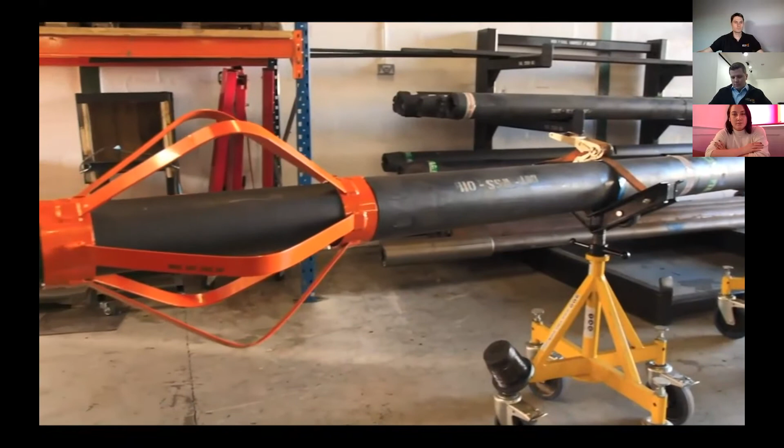DeltaTek is a well construction specialist supplying novel technology solutions to the drilling industry. Low risk, high value technology. That, in a nutshell, is what DeltaTek provide, and has done so with proven rig time savings to enable lower cost of drilling operations. That's lower financial cost, lower risk cost, and importantly, lower carbon cost.

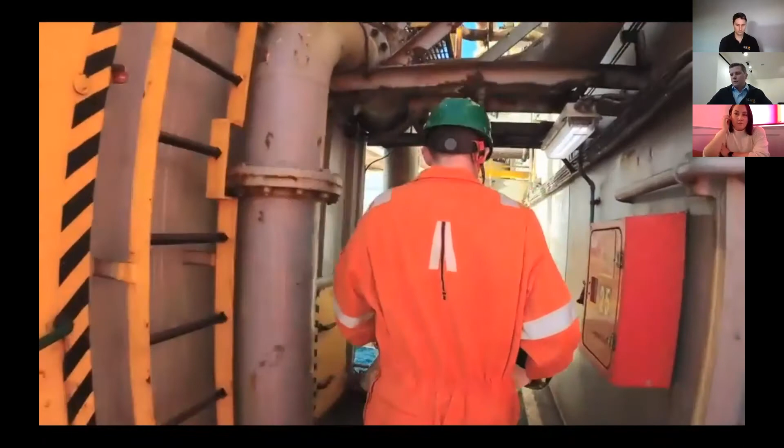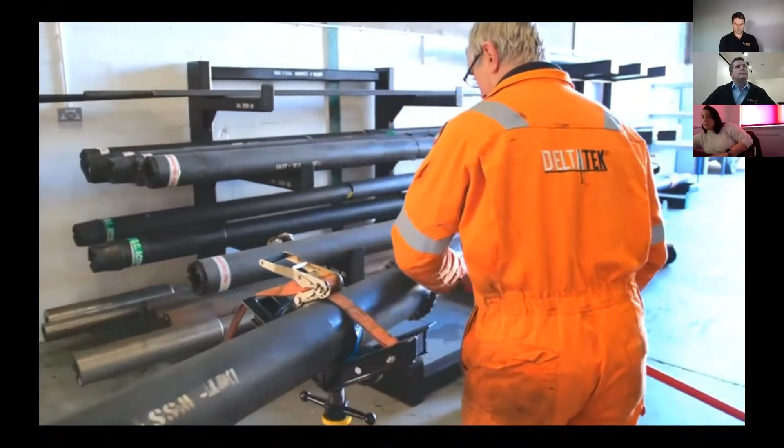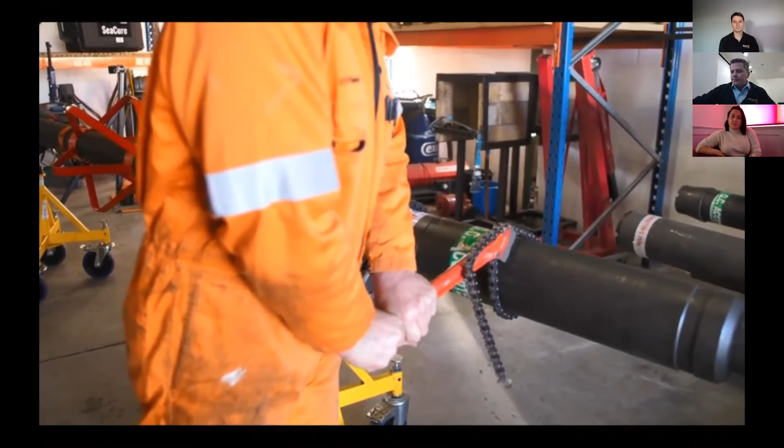DeltaTek has become a well-recognized name in the oil and gas industry, probably best known for its SeaCure technology, which has been rapidly adopted across the North Sea since its initial deployment by Chevron and Siccar Point Energy in 2018. Since these early days, DeltaTek have developed multiple low-risk technologies to further reduce its customer well construction risks, saving rig time and adding value in the process. DeltaTek now deploys its SeaCure and Articulock technologies across the globe, from the depths of the Southern Oceans all the way to the Arctic Circle.

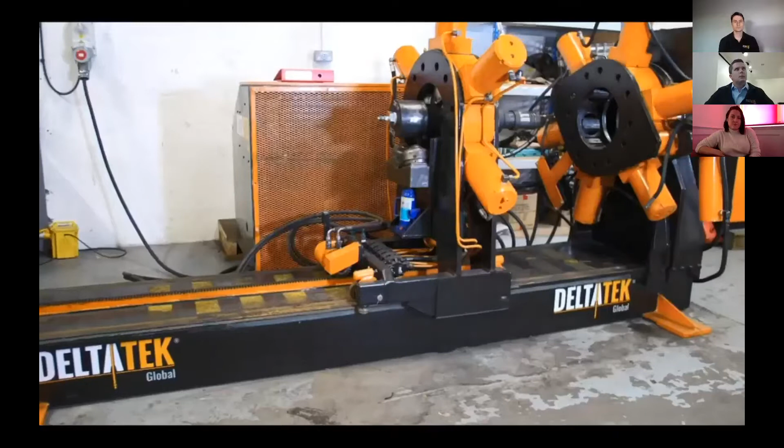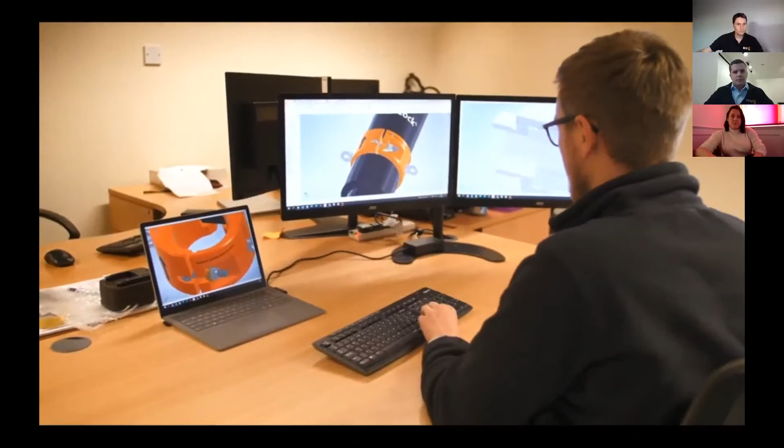Since our first deployment back in 2018, I'm happy to say we've come a long way and are about to do our 20th deployment. Our customers have shown great acceptance of our technology, mainly due to its simplicity and the value it brings. I'm also happy to say that since our first deployment, we've maintained a zero NPT. Our customers have been very engaged and really helped us develop from our first technology into what we have today. And I'm happy to say they also come back for the second and third operations, which is a testament to the simplicity of our technology.

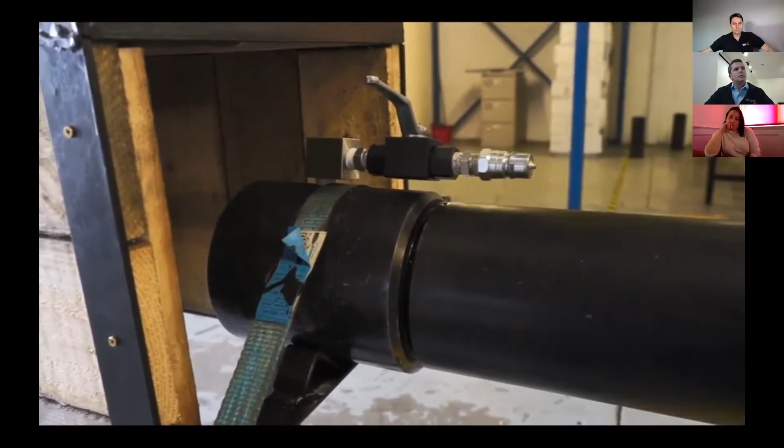We have gone from humble beginnings here in the North Sea to having deployments in the southern tip of Africa, the eastern Mediterranean, and now most recently up in the Arctic Circle. And very soon we're about to go west. DeltaTek offers a step change in well construction efficiency and has developed solutions that reduce carbon costs. That means that our customers benefit from supporting net zero targets without being penalized on a cost or efficiency basis.

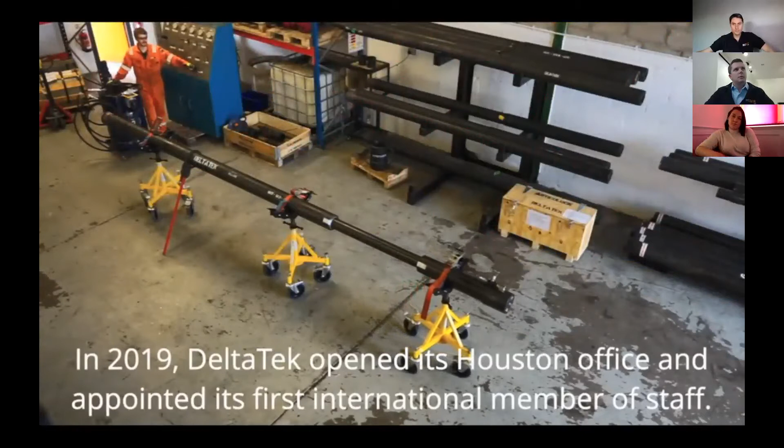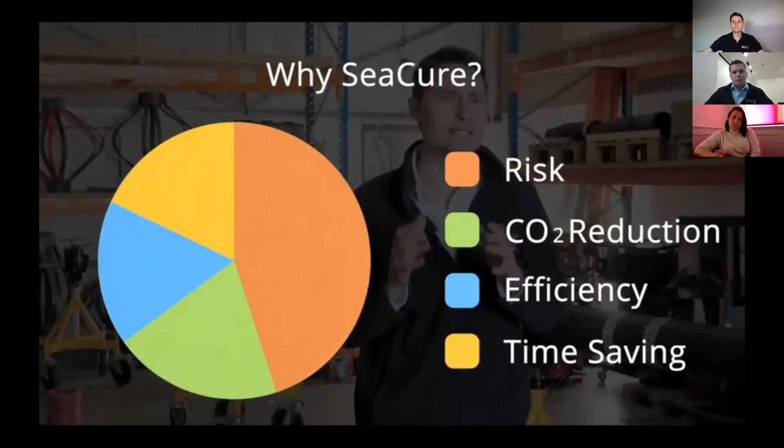We've gotten verbal confirmation from the client, working towards a 2-year contract and working out some of the technical details with their wellhead running tool provider this afternoon. DeltaTek does exactly that, supplying intelligent, time-saving, cost-lowering, risk-mitigating technologies that concurrently reduce our customers' impact on the environment from the earliest stages of the well's life cycle.

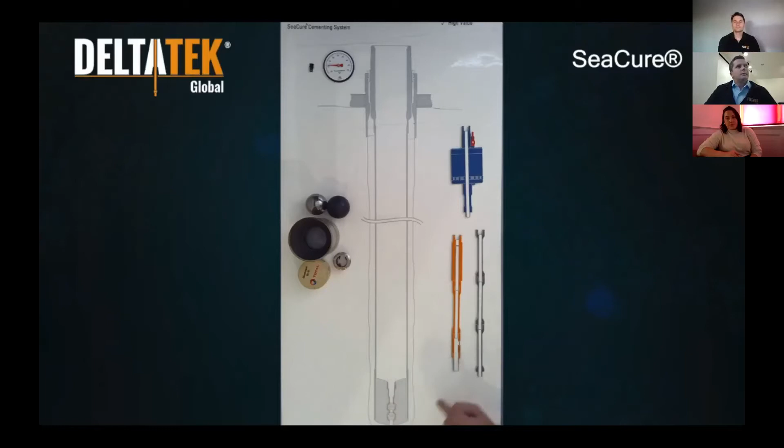For this demonstration of the SeaCure cementing system, we're looking at a riserless section, such as a cemented conductor or surface casing, for which a SeaCure compatible float shoe will have been pre-ordered with requisite latch and adapter and potentially lockdown wiper plug receptacles. Once the casing's been run and hung off at the rotary table, we're ready to run inner string.

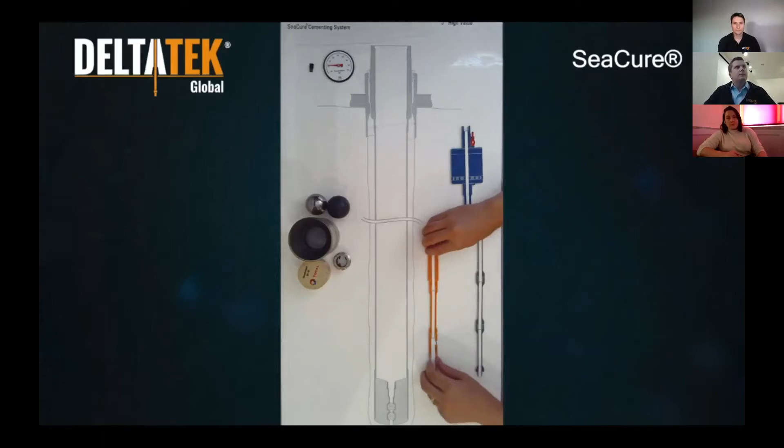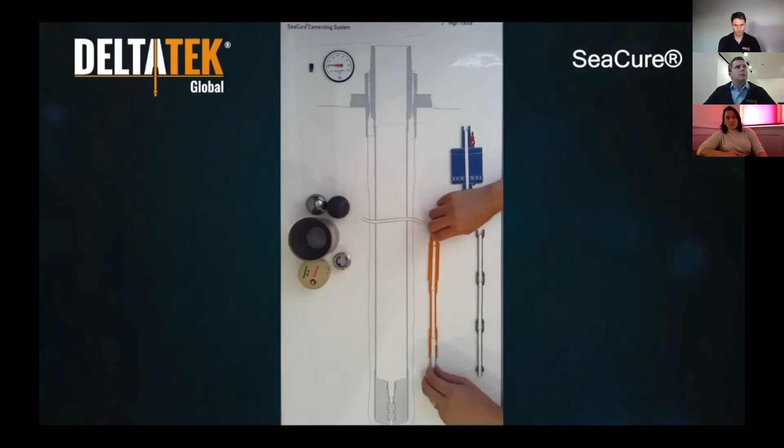The first thing that's picked up is a SeaCure BHA, comprised of our latch and adapter, weight set sub, and SeaCure slip joint tools. This BHA is 30 feet long in its closed position. Once it's picked up, the SeaCure tool strokes open under its own weight to lengthen the assembly to 40 feet. This 10-foot of stroking distance is what allows you to approximately space out your inner string within the casing bore.

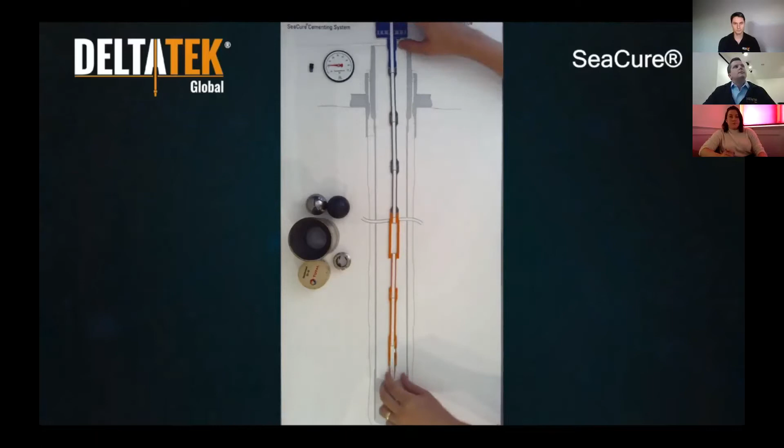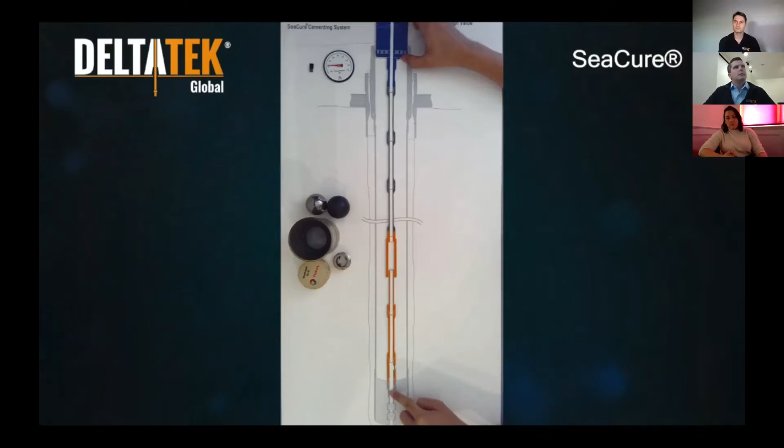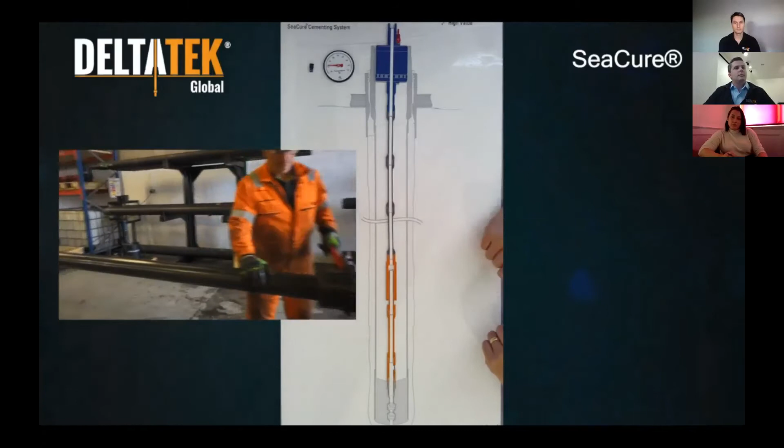The SeaCure BHA is run into the casing on drill pipe until made up to the cam actuated running tool. Inner string is then lowered until the latch and adapter engages, which is confirmed with an overpull. As the running tool is established, the SeaCure tool strokes partially closed. Upon closing just 4 inches, the SeaCure tool's internal clutch mechanism disengages to allow free rotation of the inner string along with safe makeup of the cam actuated running tool.

It's important to note that the running tool's ball valve is left open for the duration of the SeaCure cement job due to the hydraulic seals effected within the float shoe at the latch and adapter. At this point, the casing can be run to cementing depth and primary cement job pumped. At the end of the cement job, a lockdown wiper plug can be launched into the string and chased with slurry to guarantee good quality cement around the shoe.

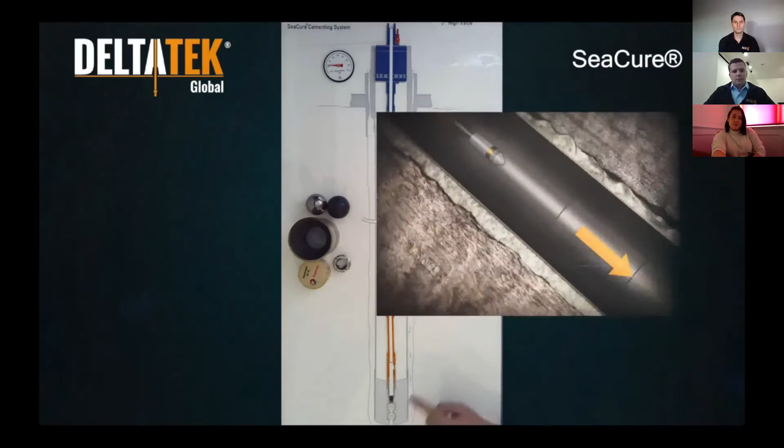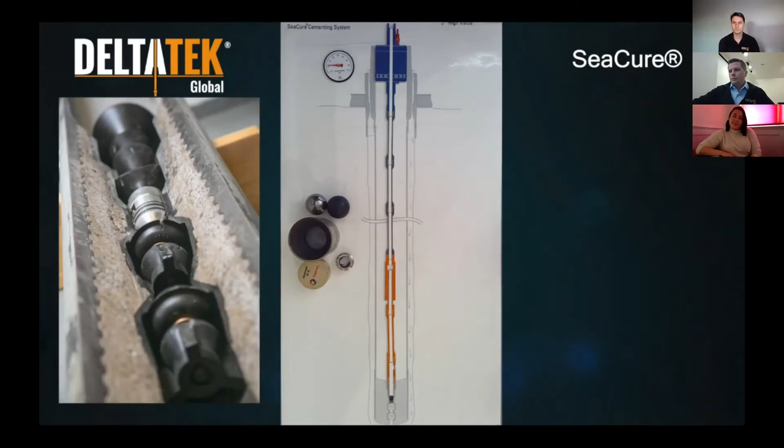It's important to note that the lockdown wiper plug effects a bidirectional seal after it bumps because of a ratchet mechanism built into the nose on the plug and corresponding receptacle in the shoe. Subsequently, pressure is applied to the inner string to actuate a burst disc that's been pre-installed within the latch-in adapter here. Once this burst disc ruptures, the remainder of the inner string contents can be circulated out via the inner annulus and vented to seabed.

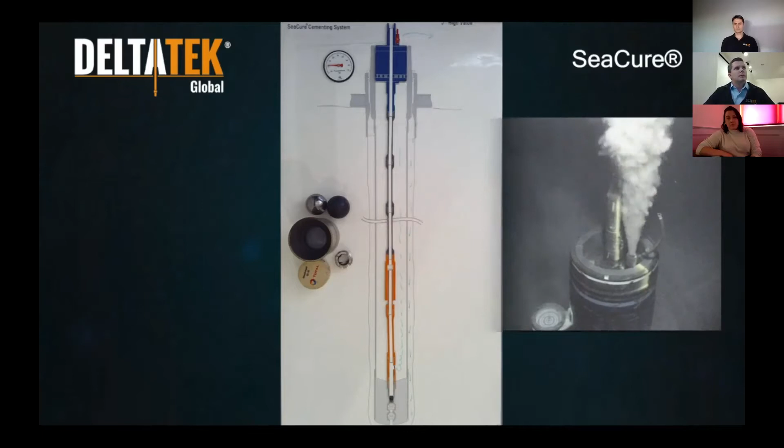The running tool's ball valve can then be closed by ROV to enable a life of well integrity casing pressure test immediately after pumping the cement job. Importantly, this test can be completed against green slurry in the borehole annulus, mitigating the risks of weakening the cement bond and creating a microannulus due to the radial expansion of the casing under pressure.

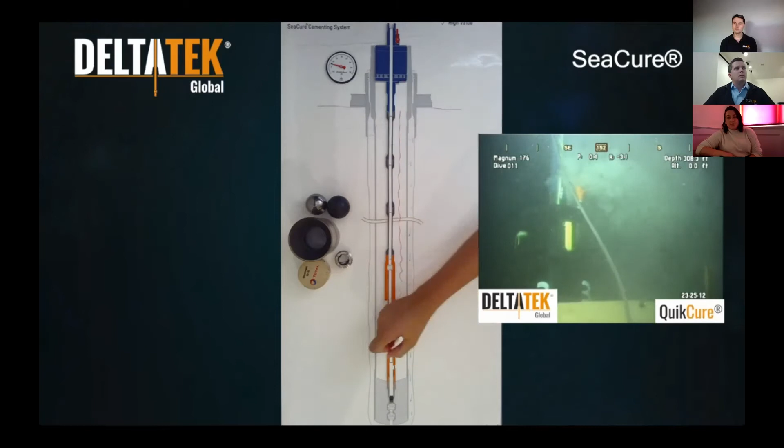It's also possible at this point in the job to introduce our patented QuikCure process. The QuikCure process utilizes a pit of seawater that's been preheated on the rig to approximately 65 degrees Celsius or 150 Fahrenheit. This heat sweep is then rapidly circulated into the inner annulus. After the casing bore has been filled with the heat sweep, a maximal exit temperature is observed on an analog temperature gauge that's been pre-installed on the running tool's ball valve.

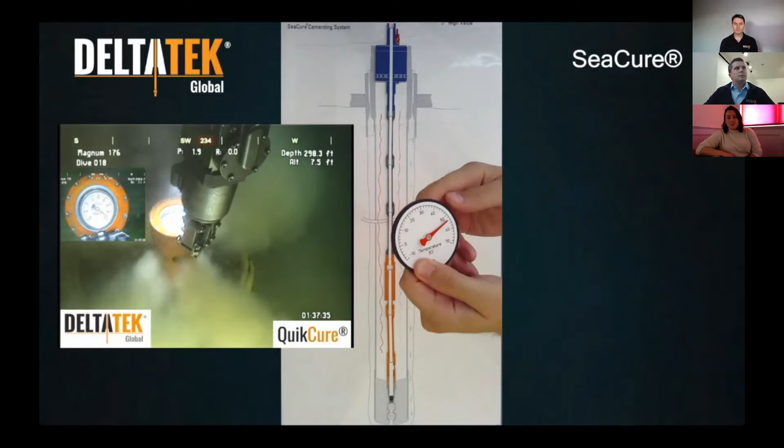At this point, the ball valve can be closed to allow the additional heat to soak through the casing wall and into the slurry. The additional heat causes a rapid build in compressive strength while reducing wait on cement time by up to 70% and improving transition time up to 50%.

As an option for most SeaCure jobs, a ball drop activation mechanism can be utilized in lieu of the lockdown wiper plug. There are a few key procedural differences for the ball drop version of SeaCure. Once the primary cement job has been pumped, instead of launching a wiper plug, the SeaCure ball is dropped into the inner string after displacing the cement job within a few barrels of the shoe.

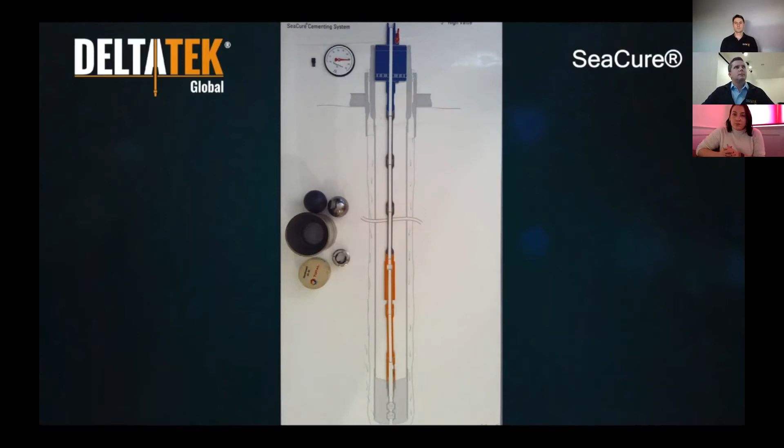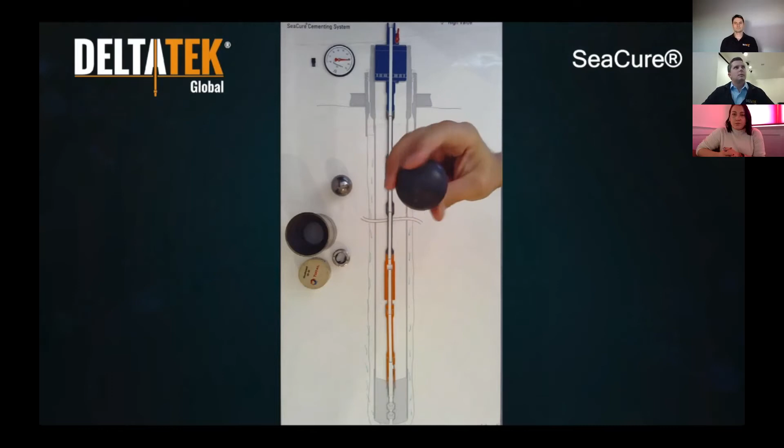The SeaCure ball starts its life as a 1.75-inch tungsten core. It's built up to 1.9 with an NBR coating, seating within a 1.88 counterbore in the ball seat that's been pre-installed in the latch-in adapter, roughly 14 inches off the nose. The ball gravitates down and lands within its seat. After pressure is applied, a half-inch packer-style seal is effected in the NBR coating. It's important to note that a no-go shoulder has been designed within the ball seat to ensure the ball can be retained.

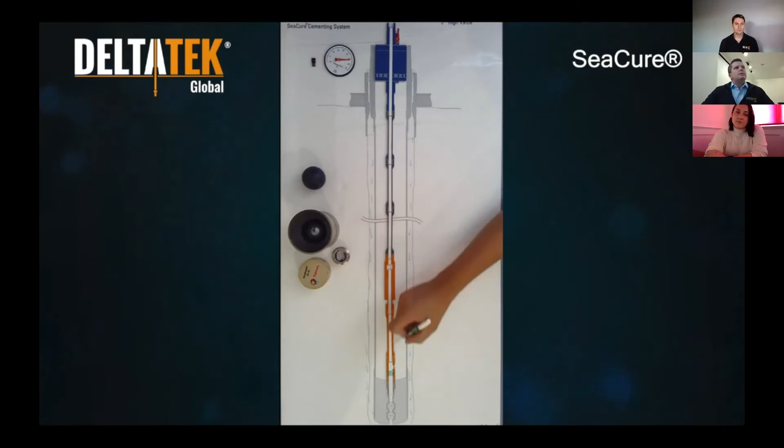The remainder of the process is the same for the ball drop version as the lockdown wiper plug version, in that pressure is applied to the inner string until the burst disc is ruptured, and the remainder of the inner string contents are circulated out through the inner annulus, and subsequent pressure testing and/or QuickCure processes can be implemented.

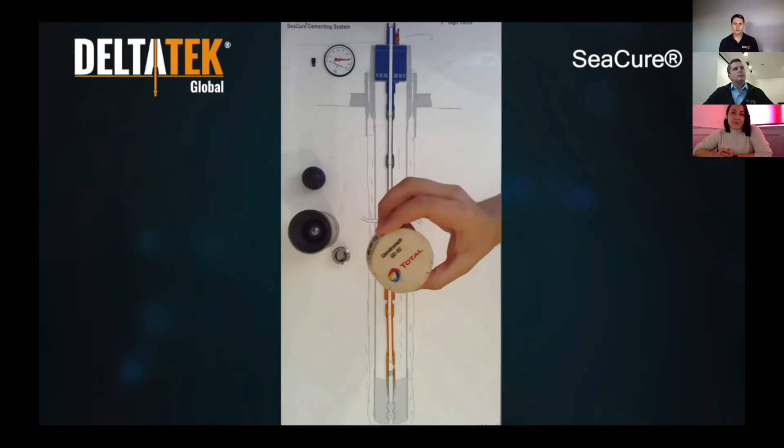However, one unique aspect of the ball drop version of SeaCure is, because of the positioning of the ball seat within the latch-in adapter, 14 inches off the nose, for jobs that wait on cement, it's possible to retrieve a down-hole sample of cement from the shoe itself. We call this feature Core Cure, an albeit qualitative but definitive example of the quality cement you have at the shoe.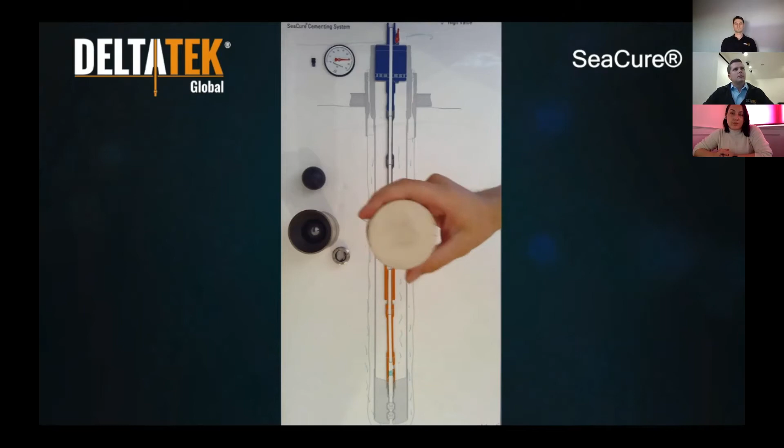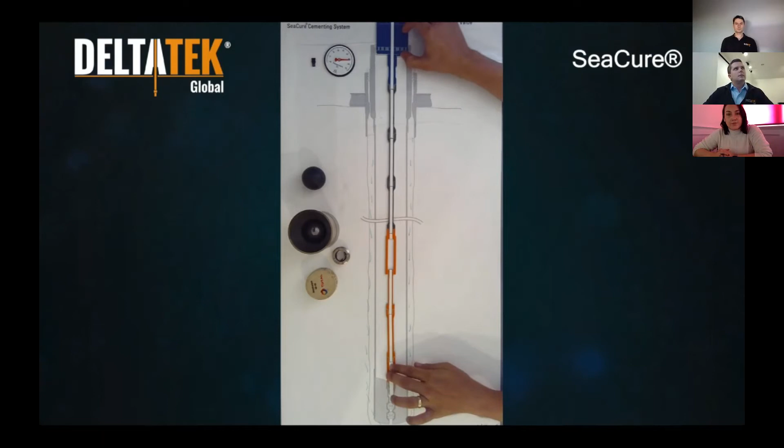The remainder of the SeaCure process is identical for any of the versions selected. Because the SeaCure tool is still in free rotate mode, the cam-actuated running tool can be disengaged and picked up safely. The last 4 inches of stroke open on the SeaCure tool engage its internal clutch to allow through rotation and for the latch-in adapter to be released through a J-slot mechanism. Alternatively, a backup shear-out sleeve built into the float shoe allows a designed overpull to release the inner string.

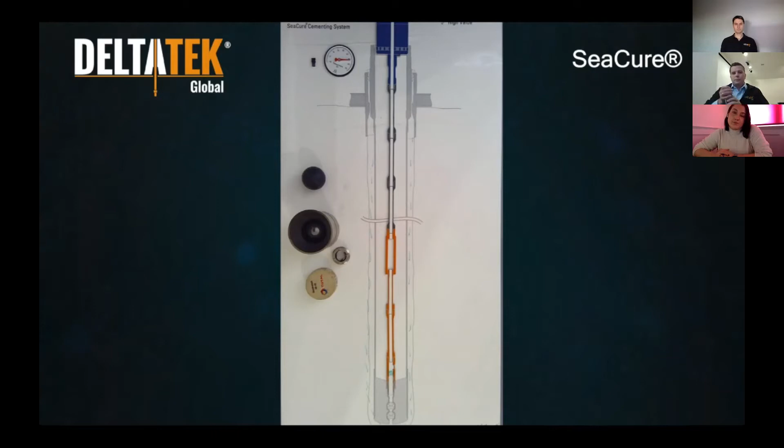Once the inner string has been retrieved, you're left with a clean casing bore, and importantly, no shoe track to contend with. Okay, so with the conclusion of that explainer video for how the system works, we've got some further slides that will go through a few other details, including the main value statements for why customers are selecting SeaCure, elaborating on some of the points made within that video.

So Tristan and Jamie, please let me know if there are any issues with hearing me or seeing the screen, and Tristan, feel free to jump in to contribute to these comments if needed.

So what is SeaCure? Again, stabbed-in inner string cementing for subsea wells. And some of the points that we like to make regarding the service is that the only long lead item associated with it is the float shoe or float collar, depending on the application. And we've got intellectual property that provides for a non-exclusive OEM. So basically we can work with any of the float equipment providers according to customer preferences, and that includes latch-in or tag-in versions of the float shoes or collars.

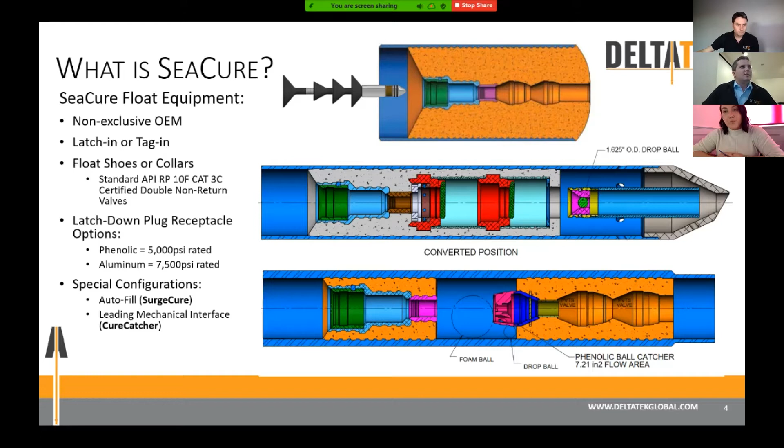So another point that we like to make is that the latch-down plug receptacle that was explained in the video has a 5,000 psi or 7,500 psi rating, depending on the material selected for that plug receptacle. And some special configurations for different applications include an autofill version we call SurgeCure, as well as a leading mechanical or multi-mechanical interface option called CureCatcher, for which we can drop in foam balls in accordance with the need to provide mechanical interfaces between the cement slurries and spacers and displacement.

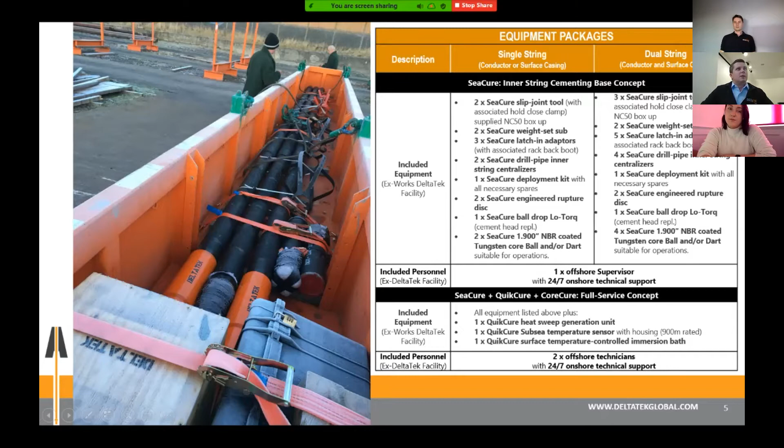What you see on this slide is an actual loadout basket for one of our jobs, and it constitutes the dual string or multi-well loadout, for which you see multiple SeaCure tools already pre-made up, and centralization, and all of the bits and pieces that we need to complete the job. So the point being that we can service multi-wells or multi-strings with just a nominal list of equipment that we can fit in one of these 40-foot half-height offshore baskets.

So leading into why SeaCure, and the main value statements, some of which were represented in that video. We try to be comprehensive in communicating the value that we see and our clients reinforce for this system, falling into three main categories: saving rig time, operations efficiency, and risk mitigation benefits.

The first one being saving rig time, which is also the company's motto. This is primarily brought through eliminating the shoe track in the most efficient form of a SeaCure job. The biggest value statement around eliminating a shoe track is eliminating a corresponding dedicated cleanout trip.

This is especially relevant for a bigger step down in size, like with the slim hole well design. As you can see in this case study, which we'll review in detail, for Chevron in the UK North Sea they drilled out a 30-inch shoe with a 12.25-inch assembly, which prior to using SeaCure required a 26-inch cleanout run. So we saved a minimum of 8 hours of rig time there.

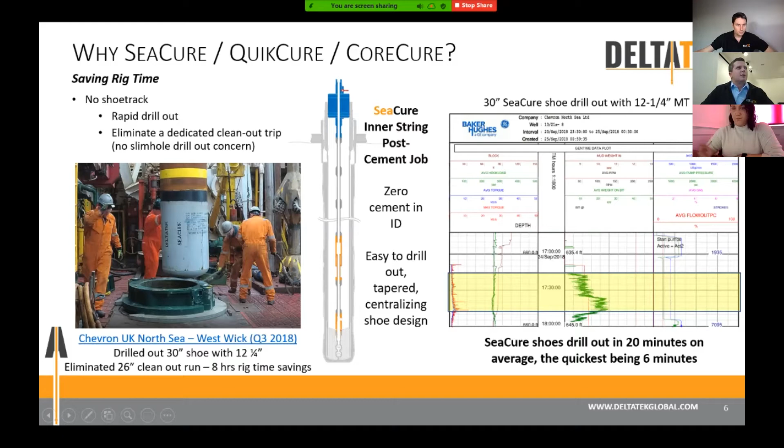In addition, when you look at just comparing the time taken to drill out a conventional poor boy shoe track of 100 to 150 foot axial length versus SeaCure, giving you just a neat little 3-foot shoe to drill out with an easy-to-drill-out tapered centralized shoe design - our shoes drill out typically in 20 minutes, with the quickest being 6 minutes, versus what our customers routinely report as a 4 to 6 hour typical drill out time for a poor boy shoe track.

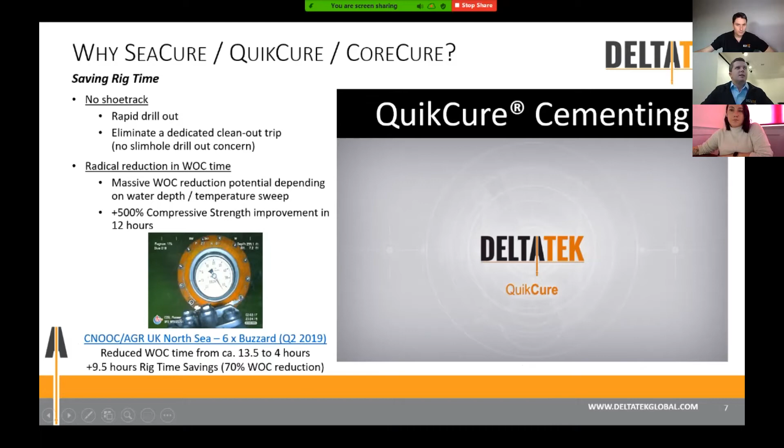Another opportunity to save rig time looks at the radical reduction in wait-on-cement time savings that we can bring through our QuikCure process, which was presented in detail in the white mat demonstration. This is the opportunity to circulate a heat sweep of fluid within the inner annulus between the drill pipe inner string and the casing bore, to apply additional heat to the slurry in the borehole annulus.

What we've been able to prove is a 500% compressive strength improvement in 12 hours relative to ambient temperature curing. We've got a case study, on 6 wells for CNOOC AGR in the UK North Sea on the Buzzard field, where we were able to reduce wait-on-cement time from circa 13.5 down to 4 hours - so 9.5 hours rig time savings per well.

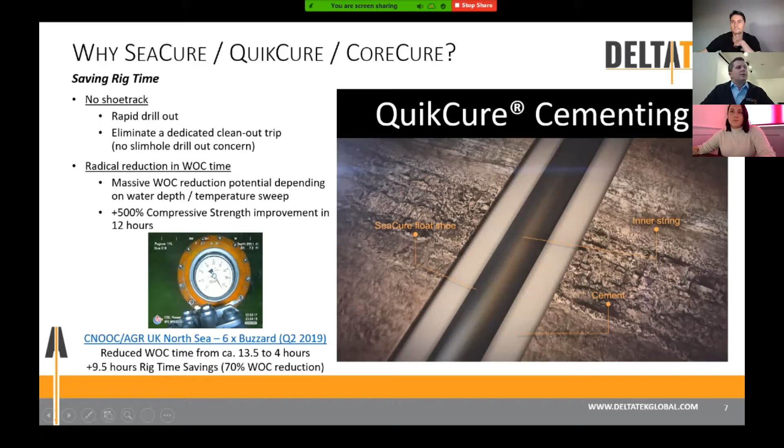Something that constitutes an obvious question is: how do we create the heat sweep on the rig? DeltaTek's philosophy in all of our technology, and certainly exemplified here, is that we try to implement a right-size solution in the simplest configuration possible. So we're typically just circulating a pit of seawater through the high pressure mud manifolding shear gun lines to heat it up to 60, 65 degrees Celsius.

What you see here in these photos is where we were able to complete that work for 500 barrels of seawater in advance of the cement job. These photos show the temperature gauge pre-installed on the running tool's ball valve, snorkel valve, that the ROV can fly over and witness as the heat sweep is being placed and filling the inner annulus in the casing.

Another thing to elaborate on is that we actually provide a controlled temperature bath at the rig. Our offshore technician will utilize the temperature profile observed for the heat sweep coming out of the running tool's ball valve to replicate what that additional temperature will provide to the cement samples taken out of the mix unit. So we're able to provide those samples to the company man as that qualitative check.

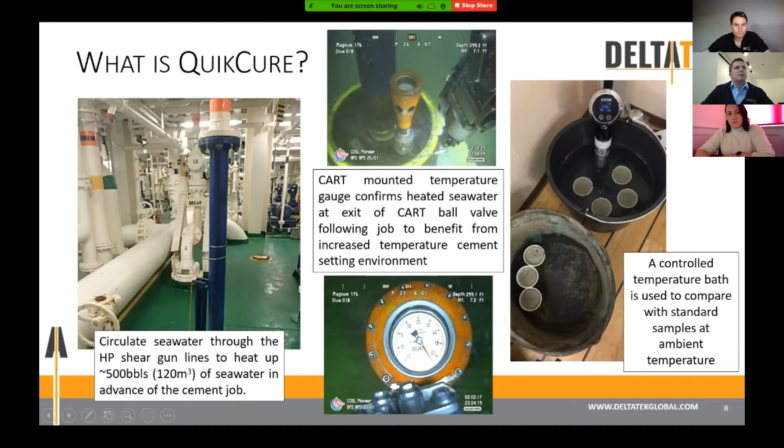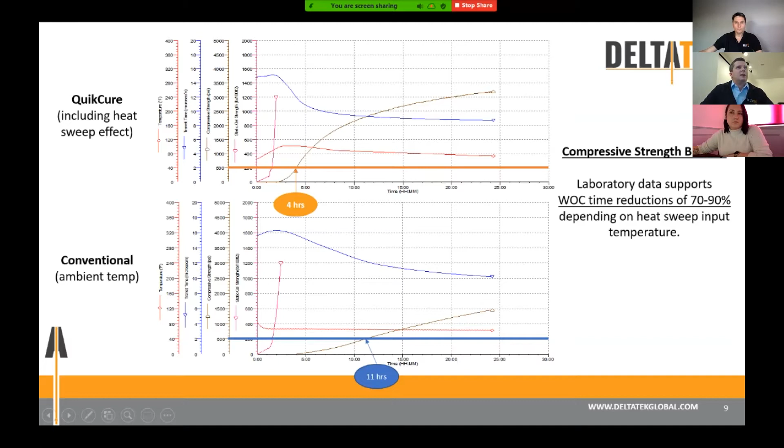Moving on to operational efficiency, the second bigger category for the value statements that SeaCure provides. SeaCure is, in general, the most flexible and efficient placement method for your cement job.

With the stabbed-in inner string interface, you eliminate the slug of cement that would constitute the poor boy shoe track. And with a lead and tail design, you save this volume of cement potentially twice, which can be multi-hundreds of barrels depending on the design criteria for the string and the size.

You also have the opportunity to witness cement returns to seabed earlier, by a couple hundred barrels, giving you the chance to move to displacement and reduce the potential for a big patio to occur, plus the additional time that would take to deal with, as well as providing an obvious environmental benefit.

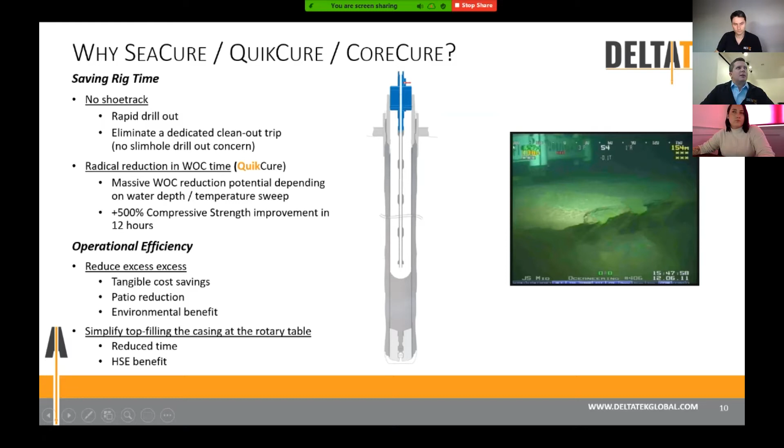Looking at environmental benefits, we have a case study that Tristan will review in more detail, where we clearly demonstrated a few hundred barrels of cement saved for one of our operator customers. Upon publishing a case study highlighting the net zero goal improvement based on this cement savings, we got recognition from the OGA in the UK for contributing to net zero technology.

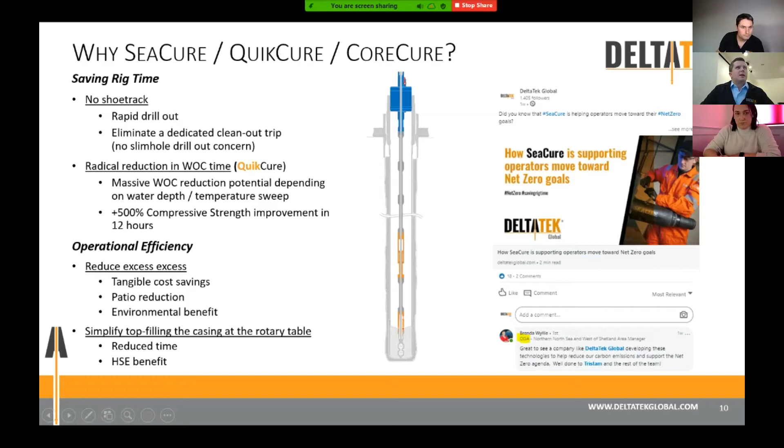The final bucket here is risk mitigation, arguably the most valuable part of the process, and why most of our customers keep coming back to use SeaCure again: in general, you get a better cement job.

You've got a lot lower displacement volume through this relatively tiny inner string versus, certainly, the plug set, where you would have a full bore displacement for your cement job.

Additionally, as in the white mat demonstration, the casing pressure testing for surface casings is a unique aspect of SeaCure as an inner string cementing setup, providing a post-cement job, in-situ casing pressure test immediately after the cement job is pumped.

One of our customers, on a dual derrick setup, had the opportunity to plumb into the running tool's ball valve prior to running the casing, and complete a 500 PSI casing pressure test before they ran the casing. This is a unique capability for SeaCure that, if you have the opportunity to use it, provides nice confirmation that all connections have been made up successfully, giving certainty for forward operations that it wouldn't introduce a leak path if one were observed.

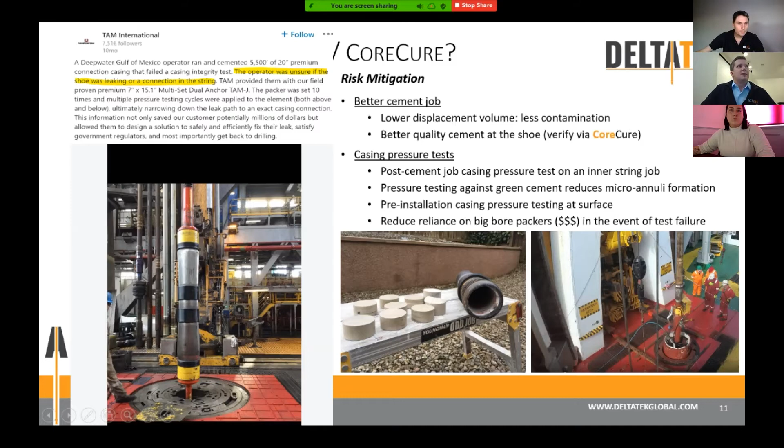Additionally, for risk mitigation, we mitigate drill bit and BHA damage, as well as reducing casing ID damage.

We have a short case study illustrating this point, where one of our clients had a 12 1/4 inch drilling assembly that was pulled for an MWD failure on stand down after drilling out the shoe and shoe track. What they observed when they pulled the bit is that they had broken gauge cutters on the PDC bit.

And subsequently to the following run, they ran a caliper to ascertain the open hole and the casing shoe track ID. And what they saw is that actually the casing ID within the shoe track interval was enlarged slightly.

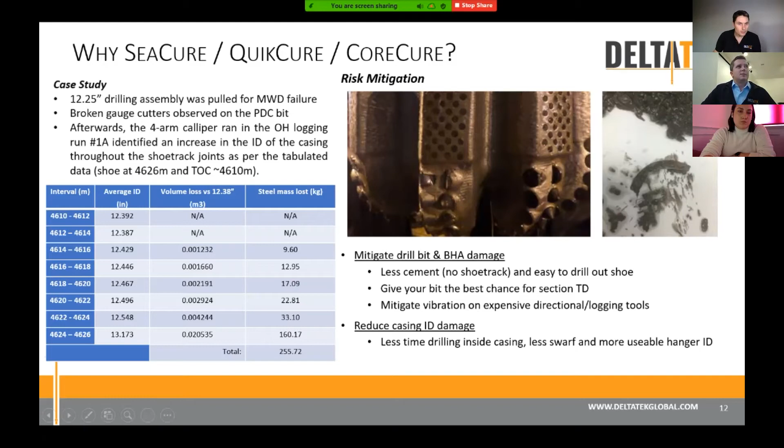And the potential there to damage your bit, potentially vibrate and damage your BHA, and damage the casing ID is greater if you have to drill out a cement shoe track than if you don't have one. So with SeaCure, you're giving your bit the best chance for section TD, as well as mitigating the other kinds of damage that you can see in this case study.

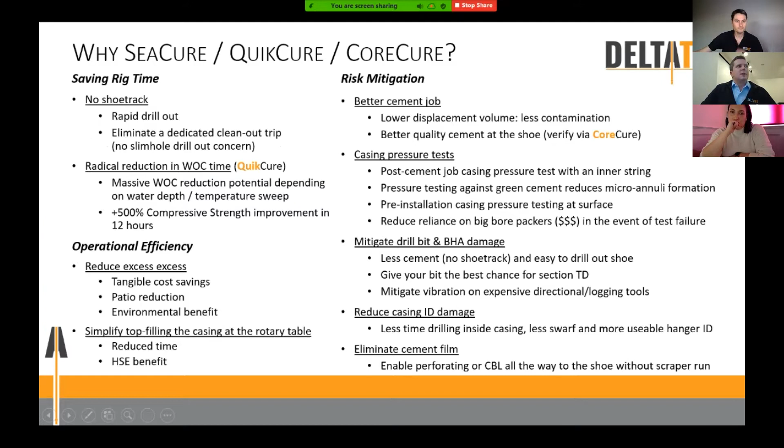So as a one-page kind of recap of all these points that we hand out as a handout for our presentations, you can see all of these value statements listed here, highlighting that SeaCure is more than just eliminating a shoe track and saving some rig time. It's quite a lot more.

And with that, I'm going to hand back over to Tristan and allow him to continue the presentation here.

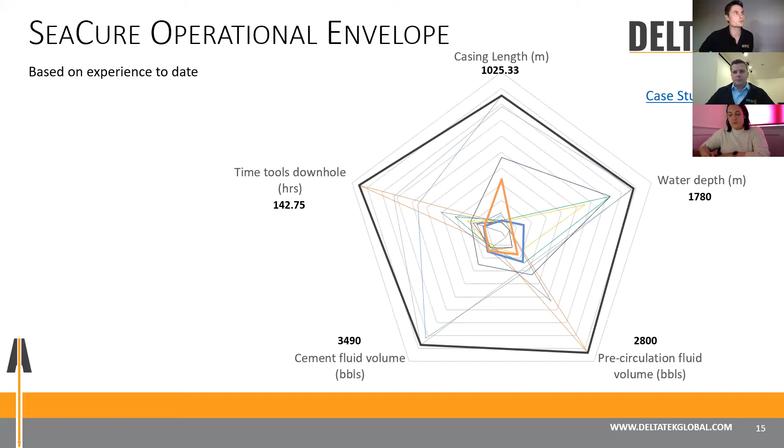And on an OGTC supported project, we were doing the inaugural deployments of our SeaCure cementing system. So yeah, only 2 years ago. But before we get into the real journey, I just want to put a small overview of what we've managed to achieve over these few years.

a single deployment of our SeaCure cementing system, with different technical difficulty parameters, as we refer to them: either water depth, casing length, how long the tools are downhole, how much cement has been pumped through the system, and how much pre-circulation fluid volume has been pumped through.

And what you can see about the technical difficulty radar that we've managed to pull together over the 20 deployments is that it is all-encompassing. It's very expansive. We're approaching water depths of 2 kilometers.

We've got over 1 kilometer of casing under our belt, and these are reputed to be the biggest cement jobs in the world, 3,500 barrel cement jobs, real monsters. But we're really proud that our system across all of these deployments has yielded a 0 NPT outcome with value add, which we're grateful for.

So yeah, skipping back to that 2 years ago, 2018, 3 of us in DeltaTek and an OGTC sponsored project with Chevron and Siccar Point Energy, we did the first runs of SeaCure.

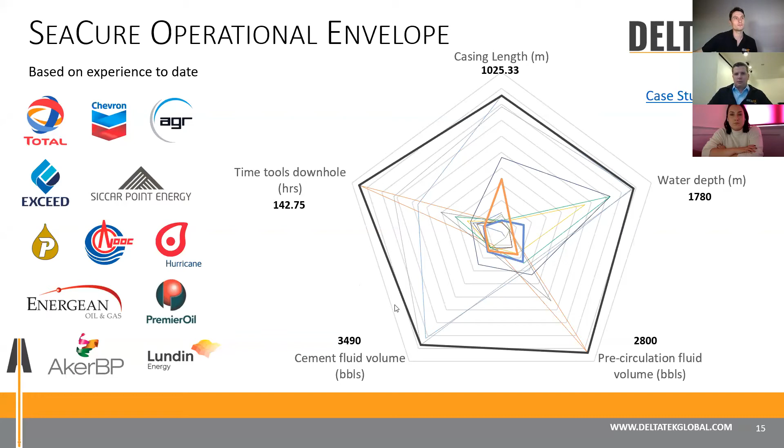This particular case study, which I'm presenting here, is the subsea deployment, which was actually preceded by 2 onshore deployments of 9 5/8 SeaCure systems.

Following the perfect results on those 2 jobs, we recognized that the growing hype around the service and the technology meant that the team of 3 that we were in DeltaTek at the time was not going to be sufficient to service that properly. So we recruited our first non-director employee in the summer of 2018, Chris Johnston, who's now our esteemed operations manager and has a team of operations supervisors reporting to him.

It was Chris and I that went to the Ocean Guardian in September 2018 on the last well it drilled to do this first subsea deployment of SeaCure, which really laid the foundations for what has become this very well adopted and market accepted technology now. Not only was it a good success with a blue chip customer such as Chevron, but it also yielded a huge amount of value.

Tyler referred to the fact that with SeaCure there is no internal shoe track, which means there's no sheath. So when drilling out slim hole, there's no need for a clean out run, and that's what Chevron enjoyed, saving 8 hours of rig time in that deployment.

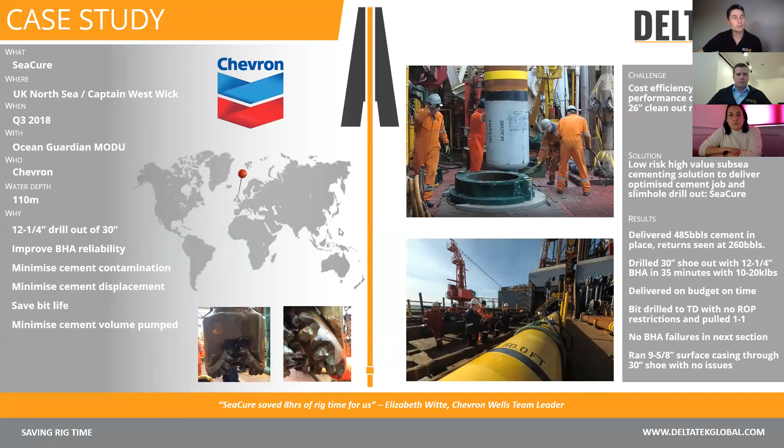Now the OGTC project that created this was a concurrent one with Siccar Point Energy. So that was our next deployment - Siccar Point Energy's West of Shetland well, Blackrock. This was another world first, the first time ever that downhole cement samples had been recovered from a string being cemented, our CoreCure service - you can see that in the bottom photograph. That concluded the OGTC project and put another really successful deployment on the belt of SeaCure, in what was approaching quite deep water, over 1 kilometer.

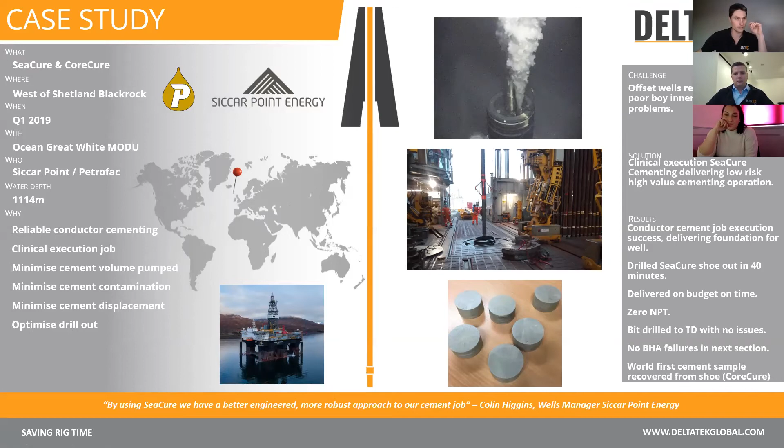The really nice thing about this deployment was that not only was it our second subsea run, 4th deployment, this was actually happening concurrently with a major operation in the Eastern Mediterranean. Chris was back out to the rig to single-handedly manage this deployment, whilst myself and our newly recruited operations supervisors Jonas Tavern, Vernon Hay, and Chris Cadiz were down in the Eastern Mediterranean on the Drill Max, doing some real deep water work on surface casings with Energean.

So the team actually had to split at a certain point during the batch campaign here in order to bring Vernon and Chris back to go and do another job in the UK.

The picture I'm trying to present here is that the adoption of this technology was really quite impressive. We went from first deployment with Chevron to doing 30% of the new subsea wells in the UK within just 9 months - a massive accolade. This particular deployment really stretched that operational envelope, giving customers that confidence that this system is reliable and capable of delivering what they want it to do.

This is still, I believe, the current standing record for drill out of the SeaCure system - just a 6-minute drill out, which is significantly quicker than what normally happens.

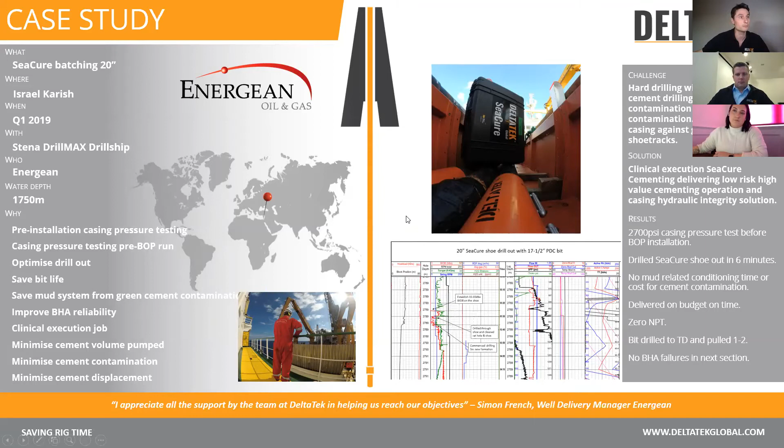Really proud of the fact that we were doing kind of 3 operations concurrently across West of Shetland, East of Shetland, Eastern Mediterranean, while still just an 8-person, 9-person company at that stage. It was really stretching our wings and showing our capability as an organization to deliver overseas and locally, maintaining zero NPT, excellent service execution, and growing our customer base.

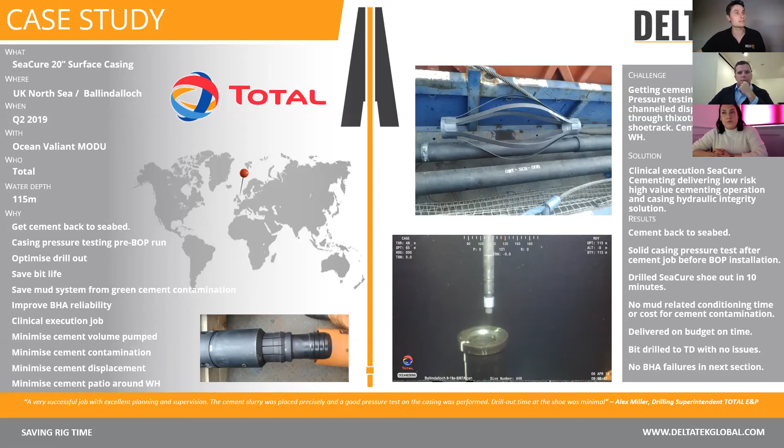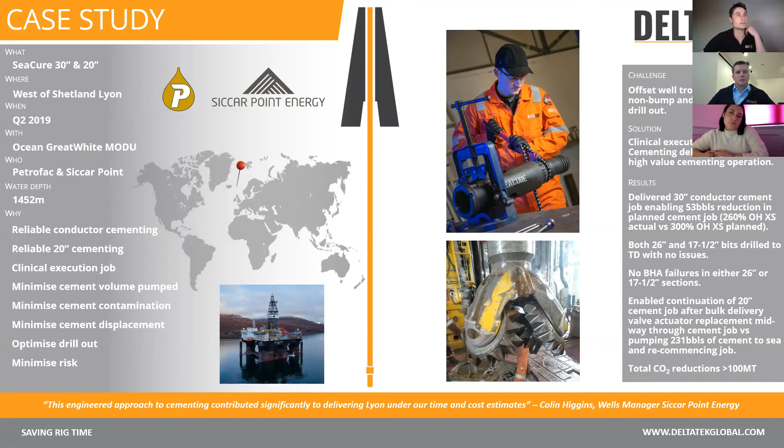Now, the story with the SeaCure one is one which I'm very proud of. There's a normal kind of understanding that oil field technology, from concept through to commercialization, takes in the order of 8 years on the journey.

Now, the SeaCure process was patented in April of 2018. Skip forward 12 months, and we had actually executed 5 successful commercial deployments of this technology on the anniversary. I remember texting the team, just for a big pat on the back on that day, to congratulate the guys who were offshore doing the work, and the onshore team who had been a significant part of that intellectual property and development journey. So yeah, massive accolade here, and we're really chuffed with that rapid adoption of the technology.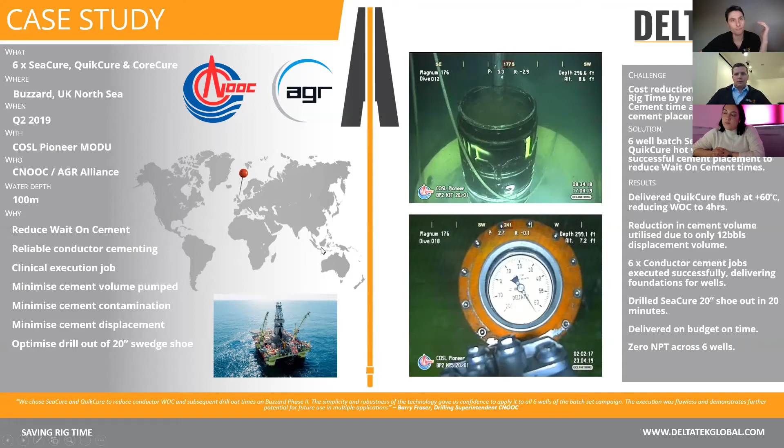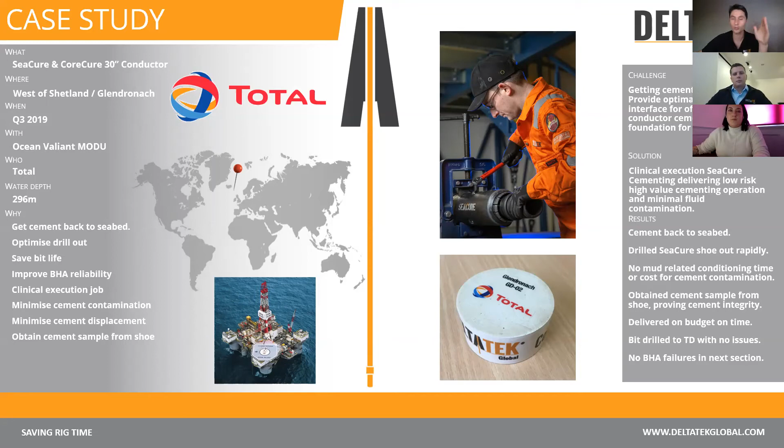I wanted to leave this case study in because it's testament to the fact that we experience massive loyalty in our customers, which we are incredibly grateful for. What we normally find is when a customer moves to SeaCure, they stick with it. This is testament to that, in the fact that Total's first deployment with us meant that they continued to use us, and they've continued to use us this year as well on their Fingen well. They've procured their equipment for future activity with us as well. So we're really grateful for that.

I wanted to pop this one in because everybody's had a bit of a stressful year, to say the least. We're very proud that Premier, who continued to operate throughout the COVID lockdown crisis, benefited from our service there on the Transocean Leader during April of this year.

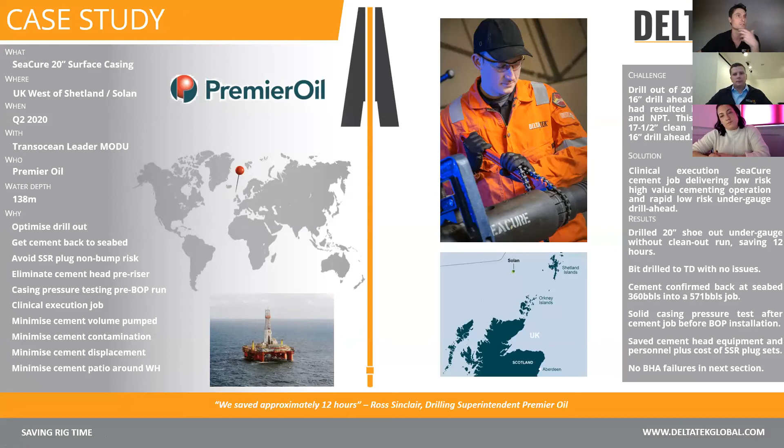New recruit Alex McGill was off to go and cut his wings on that job, and he's now working on some other deployments, which is great to see. Premier as a customer have been fantastic, and they're now spreading the use of SeaCure across some of their other assets, namely the senior DSV that was on that operation has been instrumental in pulling SeaCure into his next project. So that loyalty is something that we're hugely proud of and grateful for.

Lundin, the first operation in Norway of our SeaCure system. This was back to clean out run elimination, delivering zero shoe track surface casing cementation, meaning that undergauge drill out is not a concern. Something that Lundin enjoyed.

Following this first job, we're currently away to do the second, and we've received confirmation that their next well will also be using SeaCure. So again, that loyalty is something that comes through here. Once customers move to this solution, they stick with it, which we're grateful for.

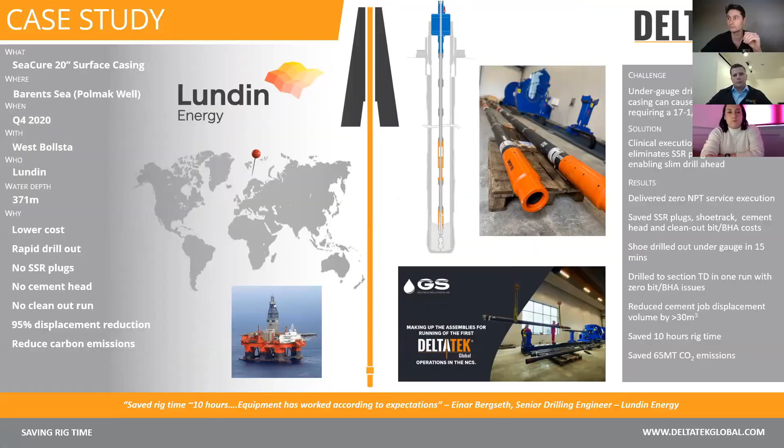So I may have demonstrated some of my passion and enthusiasm for our products and services over the last 10 minutes or so, but to be honest, that's nothing compared to what we have here in FloatCure and SeaCure RS. Don't get me wrong, I'm really chuffed whenever we do more and more value-adding SeaCure, QuikCure and CoreCure deployments. But FloatCure and SeaCure RS are true game changers in my eyes, and that of the customers we've spoken with thus far about them.

Again, it uses the exact same zero NPT, highly reliable equipment and technology that we've used thus far, just in a slightly different format. So firstly, FloatCure.

So like I say, it's the exact same inner string that we've run time and time again, except in the string that we are SeaCure cementing. Critically, what has happened is when we've been running, in this instance, the liner, after having picked up the shoe track and running the liner joints, you do not top fill the liner. So you run it dry.

Thereafter, once the dry string has been run and you're ready to run inner string at the rotary table, that SeaCure inner string gets installed, stung and stabbed into the collar, and the liner hanger assembly made up at the upper end. What you've then established is a fluid pumping conduit through the inner string, but with a designed air chamber for buoyancy in the inner string by liner ID. And the amount of benefit that this can yield is incredibly profound.

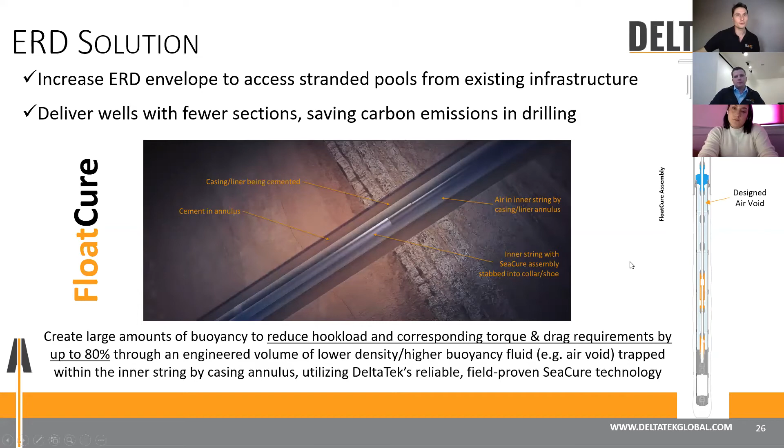SeaCure RS, our reservoir system. So this is SeaCure's little brother, as it were. It's exactly the same system in terms of the procedure and the actual technology in respect of the clutch and stroking mechanism, albeit in a smaller size. So this brings this technology to the small liner market, hence reservoir system. So really what we're targeting here is cemented reservoir liners.

What's the value? What's the benefit? Well, drilling at well TD can be the most risky few stands of the well that you drill. And sometimes that is simply to accommodate a shoe track. SeaCure RS delivers a zero shoe track reservoir liner, meaning that you either don't need to drill those few stands at well TD, or if you didn't have the luxury of drilling those few stands at well TD, you don't have to do a clean out run after having done the cement job. So, masses of risk saving as well as rig time.

The further benefit that SeaCure RS offers is that you are given a work string all the way to well TD immediately at the end of the cement job. So what that means is that once you've set the packer, you can go directly into brine displacements or suspension fluid displacements or whatever you want to do without a further full round trip. So risk plus saving rig time.